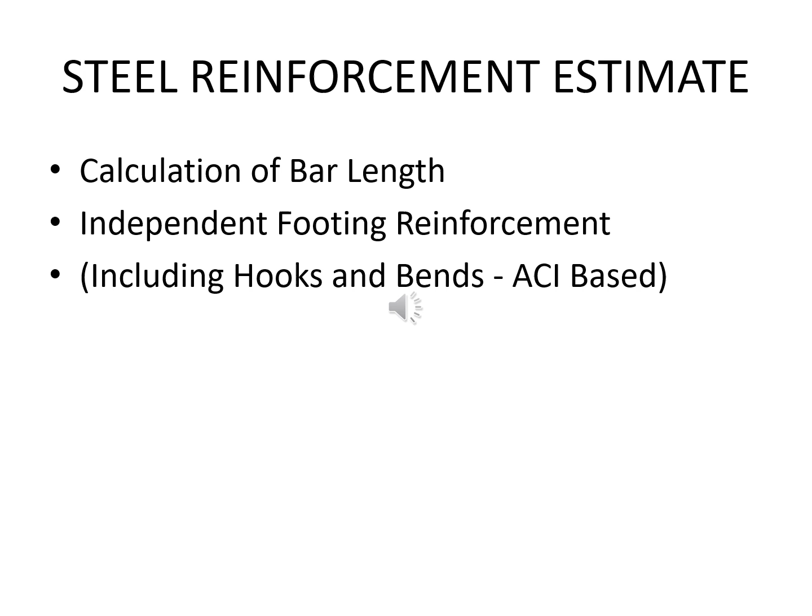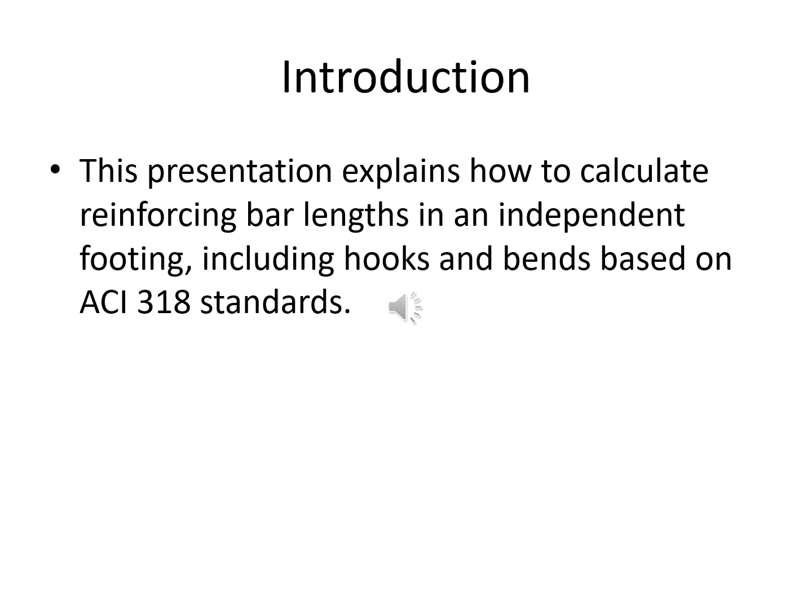So we'll be proceeding with our steel reinforcement estimate. So now we'll be calculating the bar length for independent footing reinforcement. We will include the hooks and the bends based on the ACI standards. For the introduction, we will be presenting and explaining how to calculate the reinforcement bar in an independent footing, including the hooks and bends based on the ACI 318 standards.

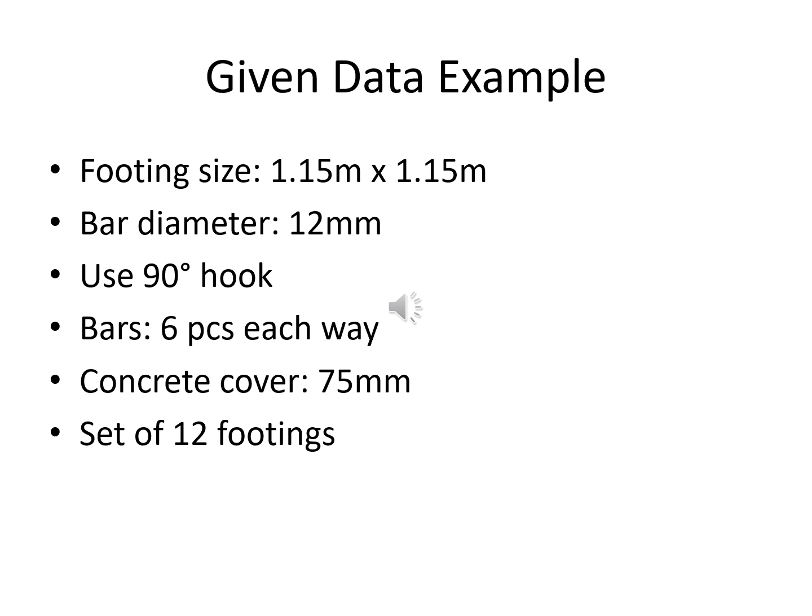Okay, so we'll go directly to the calculation. We have here a given sample data. We have a footing size of 1.15 by 1.15 meter with a bar diameter of 12 mm. And the bars are 6 pieces both ways. So, ibig sabihin po, nakalay po siya at 6 for both ways. Ibig sabihin po, the horizontal and the vertical. And then we have a concrete cover of 75 mm and a set of 12 footings. So let's start calculating.

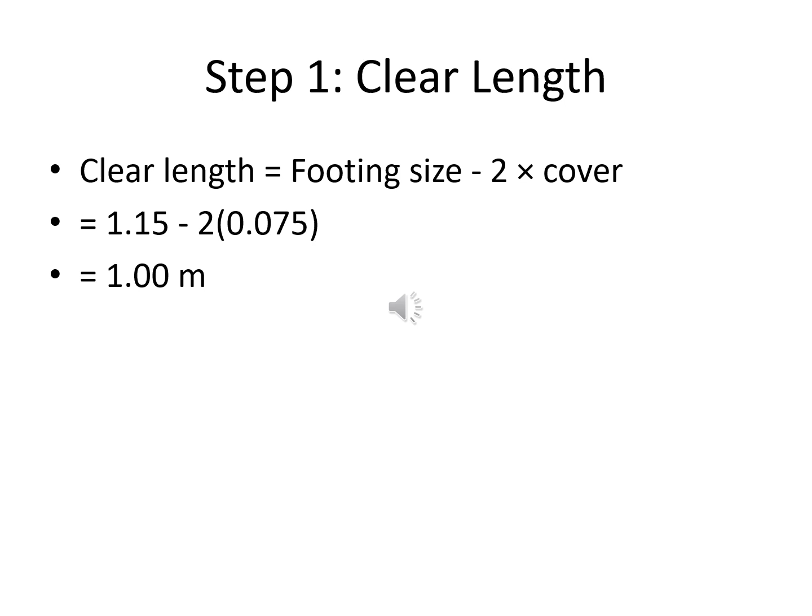So for step 1, we need to get the clear length of the bar. So the clear length is equal to the footing size minus the two coverings on both sides. So we have 1.15, so we'll minus that, ito yung concrete cover niya on both sides. So 75 mm yung given, so that's 0.075. So that will give us a total clear width of the footing of 1 meter.

So the next one is to get the hook length. So we'll have to add this with the length na nakuha natin from step 1. So what is this hook length? The hook length actually refers to the anchorage length of the hook. So yung naka-anchor na length of the hook in a reinforcing steel bar or the rebar. It tells us how much straight bar length is required after a bend, so the bar can properly transfer yung force niya into the concrete without slipping. So again, the D is equal to your bar diameter.

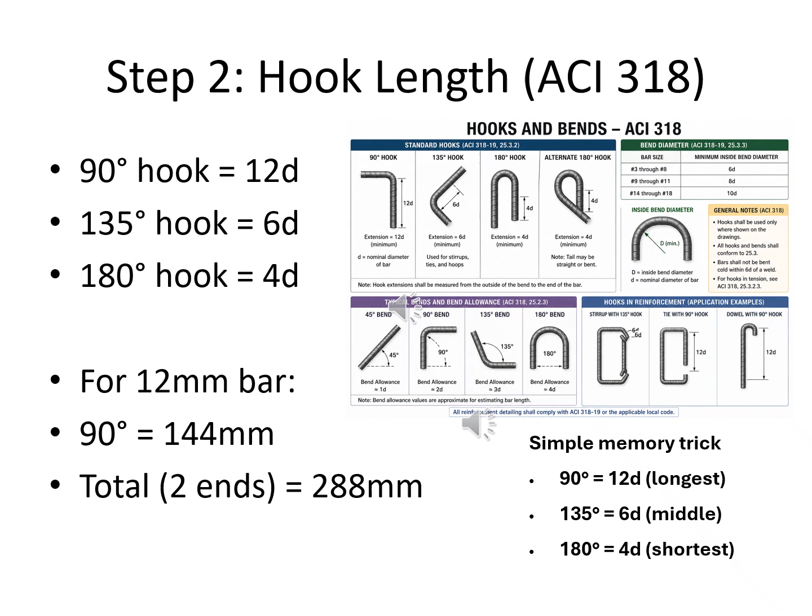Okay, so we know the standard for the hook. Now we will have to know the bend requirements based on ACI. This is a rule used in structural detailing, which tells us the minimum inside bend diameter allowed when bending a reinforcement steel bar or rebar, so they don't get cracked or lose their strength. First, what is D here? D is equal to your bar diameter. So when you see 6D, it means 6 times the bar diameter.

Okay? So for point 1 here, for smaller bars, like number 3 to number 8, these are smaller bars which are more flexible, so they can bend tighter without any damage. So we will use 6D, 6 times whatever the diameter of the bar. So ganun po yung bend niya.

Okay, for point 2 naman, for bars greater than number 8, so that's for larger bars like number 9 and above, the minimum bend will be 8 to 10 times the bar diameter. Okay po, the larger bars are stiffer and more likely to crack or weaken if they bend too tightly. So they need a larger bend radius. Mas malaki yung radius nila kasi syempre, they are stiffer kasi mas malaki yung kanilang diameter.

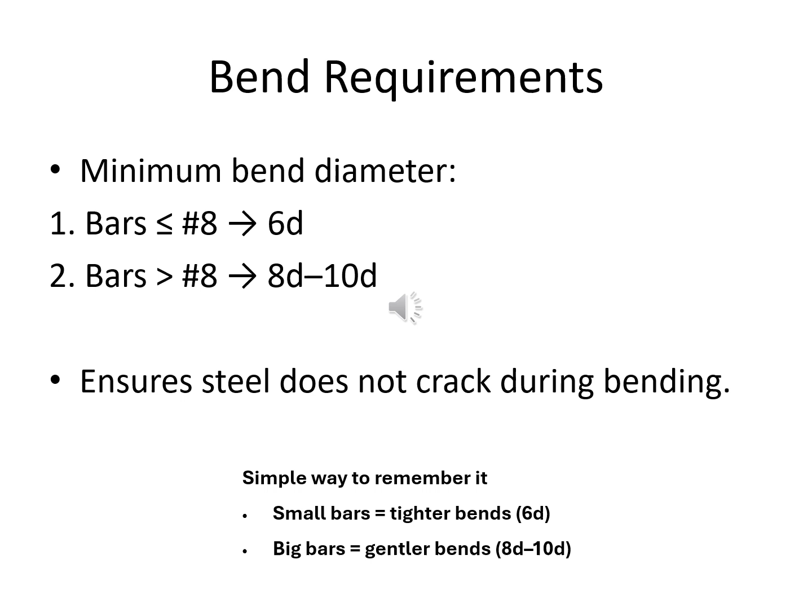Okay, but for this sample problem, we'll not be using the bend allowance and yung isa natin kanina, the bend requirements. Yung dalawa, bend requirements and bend allowance, is not being asked here in the problem. Ang ina-ask lang sa atin is a hook na 90 degrees. So we'll not use these two standards of the ACI, but it's good to note na meron tayong mga ganitong standards.

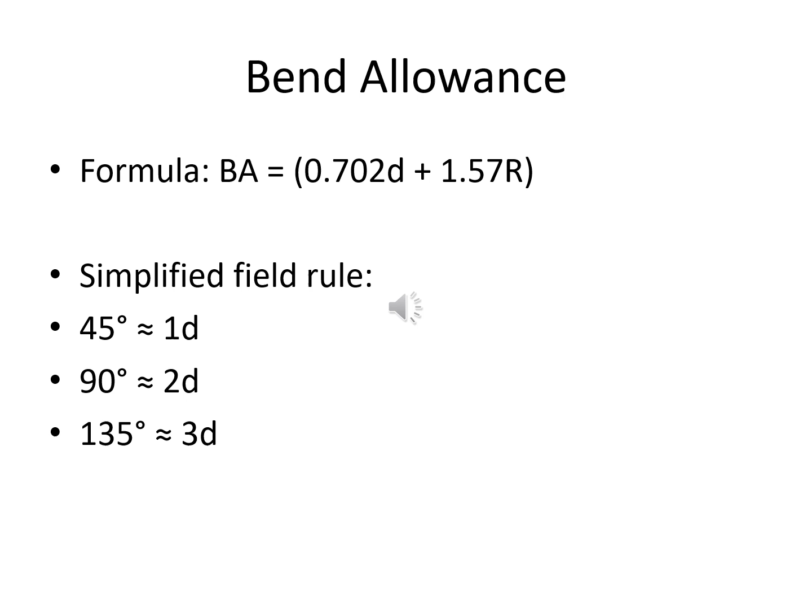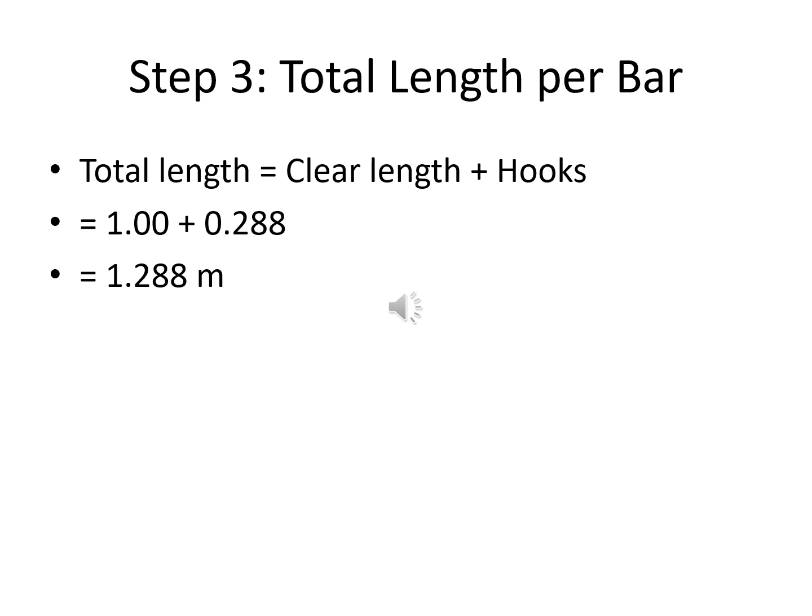Now, since we already know the length per bar, we'll calculate the number of pieces in the footing. Ang sabi sa problem natin, 6 bars each way. Ibig sabihin, one way is 6 and the other way is 6 din, for a total of 12 bars. We just calculate the total length using the per-bar length times the number of bars required for each footing. So ang answer natin, 15.456 meter.

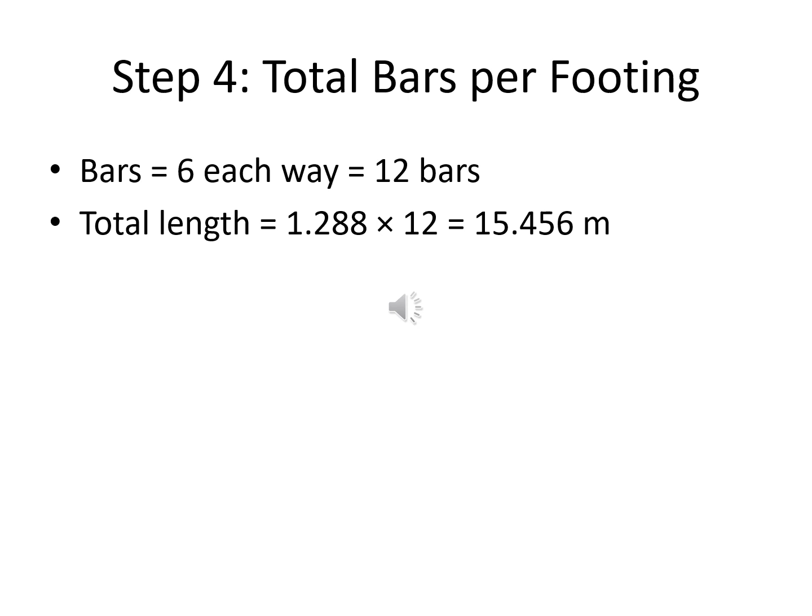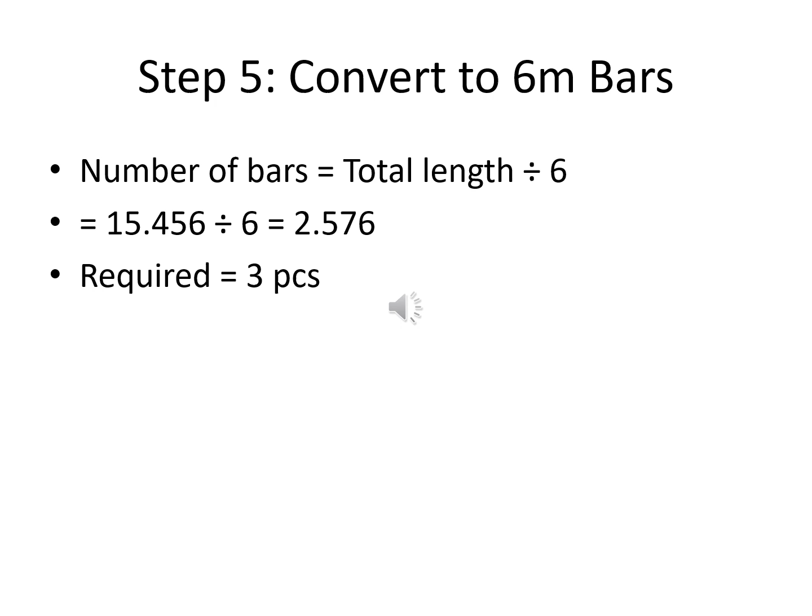And then we have to convert that kasi yung order natin na bar is 6 meters long. What we calculated is the total length na kailangan ng isang footing. We divide it by the length ng i-order natin, the commercial length of 6 meters. So 15.456 divided by 6 gives us 2.576, or we need 3 pieces of reinforcement bar.

Since there are 12 sets of this type of footing, we calculate the total length times the sets of footing. Total length per footing is 15.456, the steel in one footing, multiplied by 12 sets ng ating footing. That gave us 185.472 meter. Since we order in 6-meter lengths, divide the total length of 12 footings by 6. That gives us 30.912, or 31 pieces of 12 mm reinforcement bar.

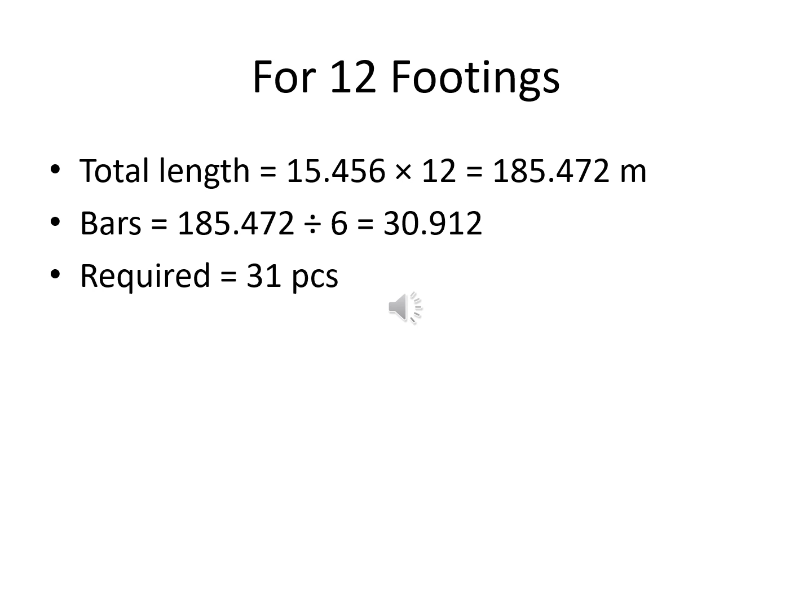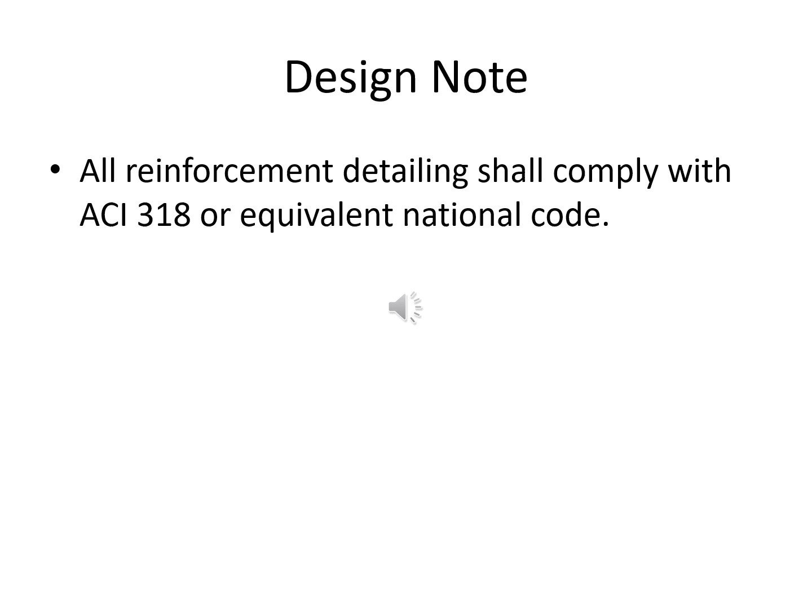So that's it, ladies and gentlemen. Ganyan lang kadali yung pag-calculate ng independent footing or isolated footing. I'll be dropping an activity for the class in a while. It is good to know that all reinforcement shall comply with ACI 318 or equivalent national code. Kailangan mag-comply tayo. Otherwise, mafo-fall short hindi lang yung estimate natin, but it will actually compromise the strength of our reinforcement bar.

I'll be dropping this class activity in your MS Teams. Napakadali lang, so I hope everyone will use their spare time to answer our quiz today. Just go through the steps kanina and you can get the answer. Let me read the problem. We have a footing designed using 12 mm diameter reinforcing bar with 135 hook. Hook lang yung kinuha rito, so just calculate the length of the hook. Huwag niyo ilalagay yung bend kasi it was not mentioned. You will have to use the 6D.

Yung footing natin has a size of 1.2 and a concrete cover of 75 mm. It contains 8 reinforcing bars in each direction, both ways. Ida-double nyo pa kasi one way is 8 and the other way is 8 din. In total, there are 20 independent footings. The task is to determine the length of each bar, the total steel required for one footing, and the number of 6-meter long bars needed for construction. Let me revise this. You need to calculate hindi lang one footing but all the footings as well. Okay po.